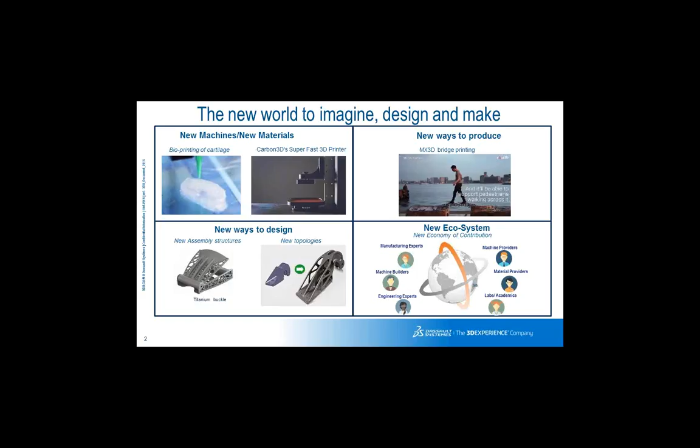And it is definitively in these new ecosystems that Dassault Systèmes plans to play a tremendous active role, providing to companies, whatever the company's industry or size, help in serving their final customers. So as you have already seen, 3D printing or additive manufacturing is really diffusing in all industrial sectors. You see here some illustrations: medical, industrial, final business to customers chain.

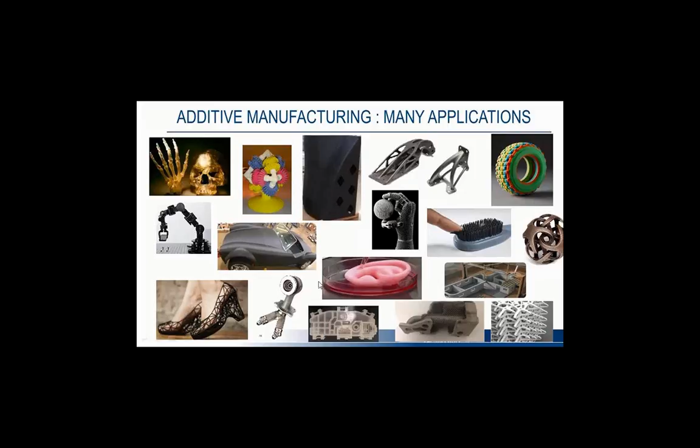And we see here different purposes, for new housing in plastic, for example, in new design, as well as architecture, where we also host in the Dassault campus a complete house that has been produced by 3D printing, and definitively in aerospace and defense, where comes the need to reduce the weight, which is attached to additional cost. To maintain a product, it makes sense to consider those new technologies as an additional and serious option to meet those challenges.

Examples in aerospace and defense, or printed parts in maintenance, repair and overhaul sectors. For ANSAT helicopters, they already produce those parts to repair the parts. But not only: just a smile to the Tour de France 2016, where a lot of participants really leveraged this new technology for their suits, for their bikes. So it's really diffusing in a lot of sectors.

I was yesterday in a 3D printing show in Lyon, where there were a lot of actors in this medicine prosthesis domain that are seeing in 3D printing technology a very strong opportunity to respond better to final clients, having lighter parts, easier to support, and for sure better to repair and install.

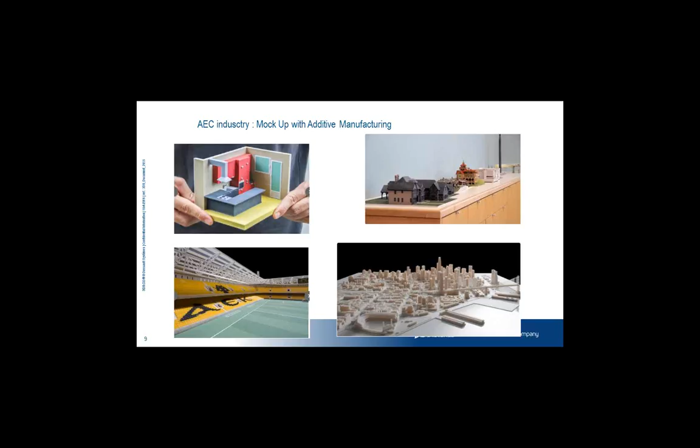But not only, the AEC industry as well, for mock-up, for being able to have a look on a building, on a house, on a city, possibility to rapidly generate a plastic 3D printed part, and to really react to customer demand in a minimum amount of time.

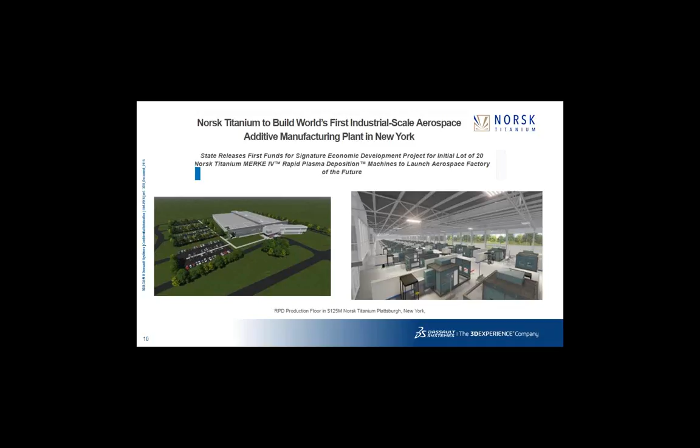We do also see a lot of plant programs that are launched over the world, where here we do really speak about printing machines, full plants. They will deliver 24 hours a day parts that will be either metal or plastic, in order to support whatever industries. So this trend is really massive over the world.

We do also see the European Union that is really seeing in additive manufacturing a huge digital economy transformation, helping the economy of all actors in Europe. But not only, you already have in Spain the Asociación Española de Rapid Manufacturing that has been put in place with a referencing site, aserm.net, as well as ADDIMAT, I guess you are aware, that are really showing the strong activity in Spain of additive manufacturing, without forgetting to mention the first congress you had in Barcelona in June this year.

So all being said, there is definitively a momentum where all industrial sectors, for new product, for innovation, for maintenance, for repair and overhaul, for additional services in order to get new weight-reduced parts, do really show a strong interest in these manufacturing industries. So let's see how now Dassault, with a suite of products and 3DEXPERIENCE, is proposing responses to those challenges.

Last but not least, I guess you have understood, additive manufacturing is really embracing all sectors, all business profiles, architects, students, engineers, design entrepreneurs, shoe manufacturers, drone enthusiasts, whatever. So all industries, all sizes of industries are really impacted.

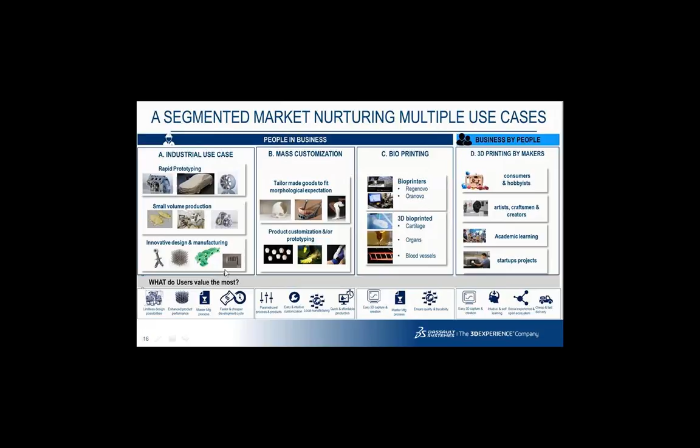And having this said, we do really distinguish the industrial use case, on which we plan to support you in metallic as well as plastic, but also concrete additive manufacturing technologies. And for this, we illustrate for powder bed fusion, for example, or direct energy deposition, some solutions that will be presented in a minute, as well as material extrusion.

So, as I said, we see this additive manufacturing as a kind of circular set of big actors. First of all, in silico material engineering, because we speak first about material, whether metal, alloy, carbon, plastic, to really at a microscopic level be able to serve you in better managing the characterization of the material you're going to have in your printing machine and the mechanical properties you could expect from it.

Second phase, which is what we're going to demonstrate in a few minutes, the functional based generative design solution, in order to give the conceptors and designers a tool easy to use to develop and generate a first concept that will benefit from design optimization, that will follow some acceptable stress rules as well, and also have a perceived material shape aspect acceptable for the final usage. So this second step, presented in a few seconds, is the first brick of our offer that will be progressively put on the market.

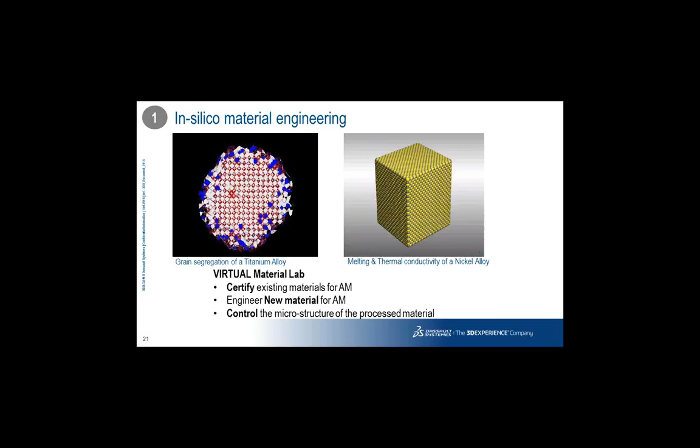Definitively the solutions that are going to be presented to you will be aiming to provide you once again easy-to-use design solutions that will be based on a kind of scientific approach with FEA calculation and optimization that will be completely, let's say, transparent to the end user. So it's very important to take care of the acceptance of such tools by the designers in order for them to adopt and use them in a very regular way.

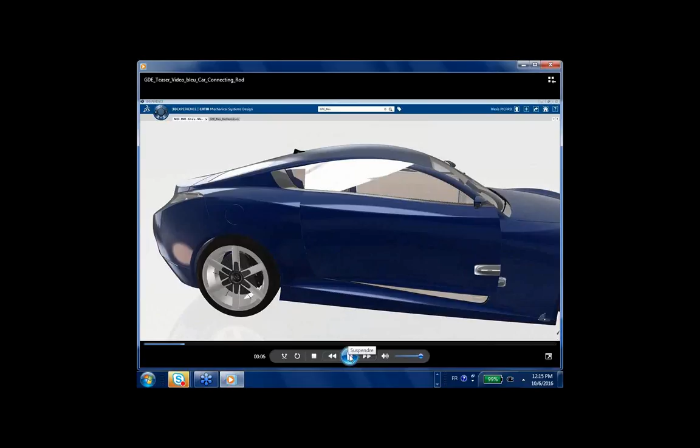Let me show you one illustration of this additive manufacturing fabrication offer in a context of car design for innovation. I do guess you do see my screen. So here we are designers of a car component for a door opening system, and we want to, let's say, produce this gray part in an additive manufacturing manner. So we are in the 3DEXPERIENCE platform of Dassault Systèmes, enabling the designers to start from a very detailed, original concept to run a first kind of design.

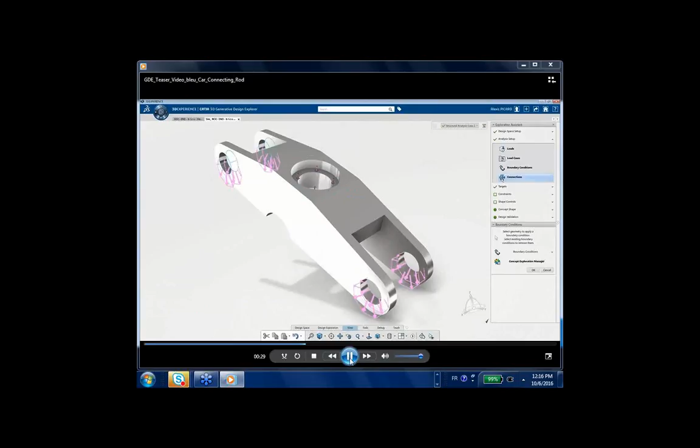So we are on the first creation, where the designer will simply take the part in the assembly and partition it in order to consider the areas of importance of the part, where it will define the way this part is linked to the exterior. So it will define its requirements in terms of boundary conditions. It will as well define the loads and boundary conditions that will apply on the part, the way the part will be connected to the exterior, in order to really take into account how this part is going to be used in the context of the assembly of the car.

And then it will put an objective, for example, reducing the mass of the final part by 25%. Then in a transparent manner, the computation will be run, where at the end the end user designer will see the distribution of the density of the part and the way the part will be optimized. At the end, you will have a final proposal that will be validated against the original stress acceptance in terms of maximum stress, ensuring that it fits the expectation.

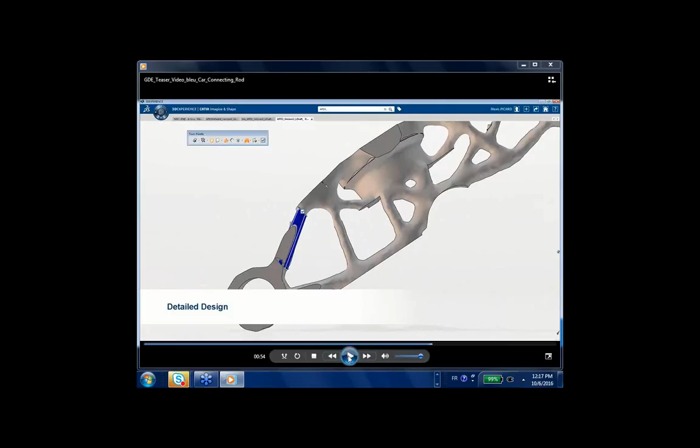And the final step will consist of redesigning some detailed parts, benefiting from an integrated set of tools inside the offer, enabling the end users, from a perceived quality aspect, to get acceptable surfaces on the final part. So this is the final phase of the offer we are now putting on the market, enabling from an original part to really optimize the final one in order to get weight reduced in an optimized way.

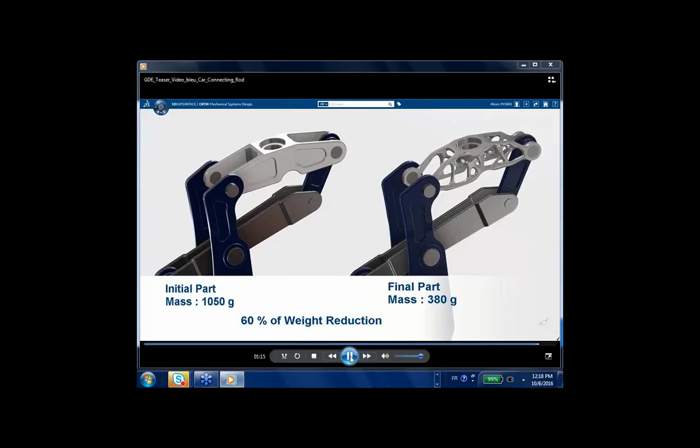So this is just, let's say, an appetizer where you immediately see the huge gain in terms of mass reduction that you can get from this approach. This is an example in the car industry. This can definitively be duplicated in other industries, and it will be with pleasure that Daniel Pyzak will now illustrate to you how this solution is running. Daniel, up to you.

Okay, merci Jean-François. Now, Daniel, you can speak, and in a few seconds I will give you the control of the presentation. Okay, just a second. Yes. Okay. It's now loading your screen. Okay. The floor is yours. Okay, thank you, Nicolas.

So, as Jean-François stated earlier, there are 5 important topics to cover when we talk about additive manufacturing. I will come back to the first, the fourth, and the fifth, but I will focus more on the second and the third in my presentation. So let's start with the part design aspect.

You know, I'm visiting a lot of customers everywhere in the world dealing with additive manufacturing, and when I meet them, some of them are proud of themselves, some of them are not. But the ones who are proud tell me, Daniel, after 4 years of experience with this new additive manufacturing machine printing metal parts, I can claim that my success rate is 75%. It means that 25% of the parts that they are 3D printing in metal have to be thrown away.

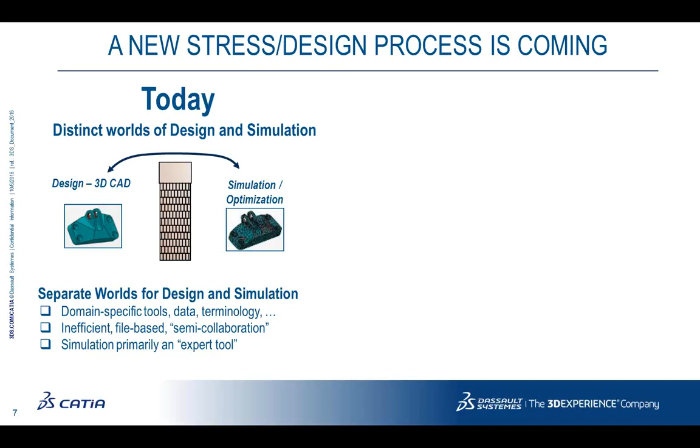But topology optimization is still today something very complex. You need some finite element analysis background. You need some guru expert in CAE, and typically mechanical designers like me do not understand them. We are not using the same language, and we are not talking to each other. So the idea is to take the best of both worlds, the CAE expertise of the gurus and the mechanical good sense of designers, and bring those two worlds together in one single application. And this is typically what we are delivering today in CATIA.

It's called the Generative Design Explorer, and it embeds not only topology optimization, but also structural analysis and reconstruction of the CAD model from the result of the topology optimization in a very simple, easy to use way, with no data exchange and no data transfer, and it is for us the future of design. After CAD modeling, then solid modeling, then feature-based modeling and functional modeling, now we are really doing science-based design, where the system proposes a solution, and then as a designer you take your responsibility and modify the design if needed to fit your specification.

Let's have a look at how it works. The best is to run a video, and I will stop at any time to explain the various stages. Okay, let's start. I'm a mechanical designer. I am in CATIA 3D Experience, and I have the app called Generative Design Explorer. In this app, I have everything I need to perform structural analysis, topology optimization, and reconstruction of my CAD model to be either 3D printed or manufactured in a more conventional way, such as casting, injection, stamping, or milling.

Okay, so let's start. The part we would like to redesign, thanks to science-based design, is this part in the middle of the screen. As you can see, it is fixed on a beam with 8 different bolts, and it is supporting a heavy part which is rotating. Okay, so let's start the process now.

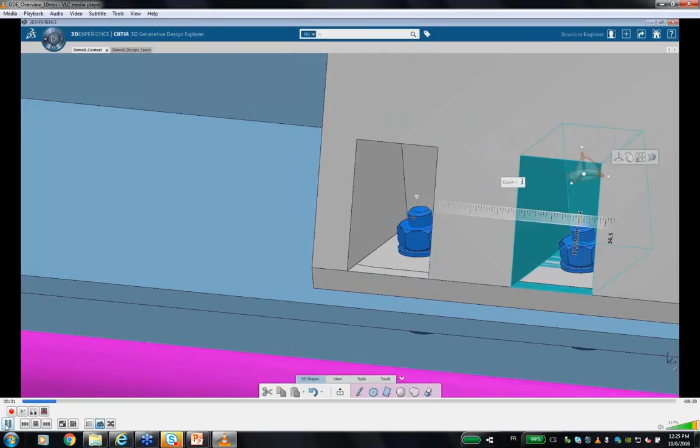The very first stage of the design is to create in 3D the so-called design space. The design space can be seen as an allocated volume in space where my future part will be located. Here we could have used our solid modeling Part Design or our surface modeling Generative Shape Design in CATIA. We decided to use a new app on the 3D Experience called CATIA Natural Shape. As you see, it's a very simple tool, direct modeling, very simple to use. It can be used by FEA guys as well as CATIA geeks, and it creates an allocated space.

This space could have been given to you or to me by my boss, because this is a STEP file coming from wherever, or it is just the allocated space from an assembly that I have to deal with and create my part inside. And this is my space. Now I'm still in the 3D Generative Design Explorer app, and I'm starting to prepare my specification.

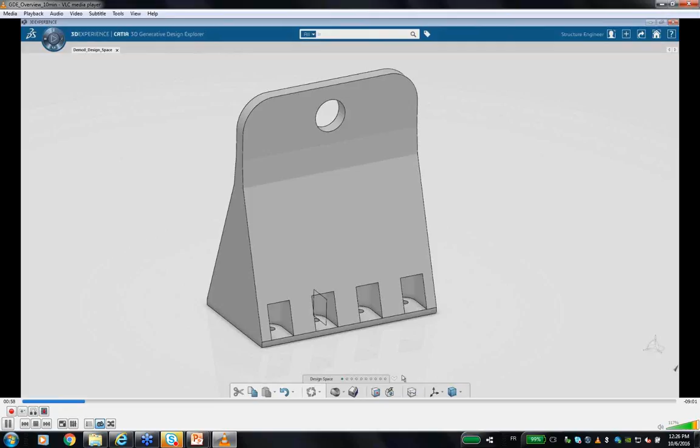First, very important action, I have to assign a material to my part. Let's select this material. That's it. And now I will carve out, I will partition my space into subspaces. Typically, those subspaces that you can see here around this axle and around the bolts are areas where I would like not to remove material. I would like to keep some material around that.

As you see, it's a very simple, straightforward user interface. You have a wizard with traffic lights. When the traffic light is green, you go to the next step. And when all the traffic lights are green, you can launch the computation. So here I'm defining my functional areas, okay? If I want, I can at any time display the mesh because it's a finite element model here. Usually we don't do that at the beginning, we do that at the end if there is some tuning or refinement to perform to the analysis.

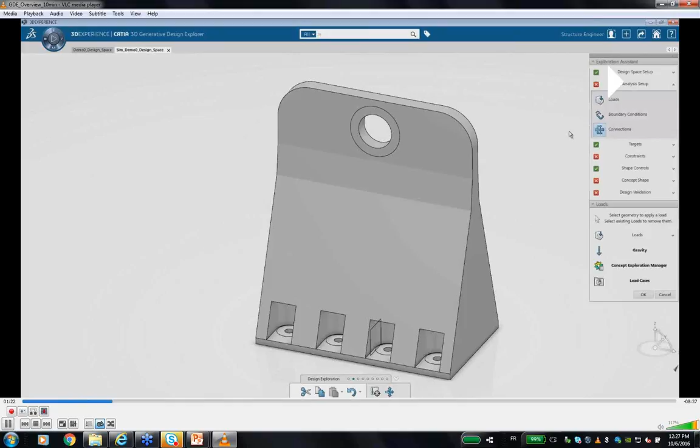Okay, my functional regions are those. I click on them, very simple. And this one, we have 4 bolts, we have the axle areas. This is done. Now I will define my loads and my boundary condition. For the loads, it's very simple. Here it's a bearing load, so I select bearing load among the various available options. And I type in the force in X, in Y. So this is here in X. I type the force in Y. So I have 2 loads, and I will combine those loads, bearing load 1, bearing load 2, and I will create multiple cases. So I have the flexibility of combining those bearing loads in multiple options.

Once the loads are defined, I can define the boundary condition. I could have clamped the part, could have taken the bottom face and said it is clamped. Here we are a little bit more precise. We will define the boundary condition as being done through fasteners. So I will define now my fastener boundary condition. I click and I select, as it is a bolt, the head diameter, the nut diameter, but also a stiffness both in translation and rotation. Those are easily done in the Generative Design Explorer app.

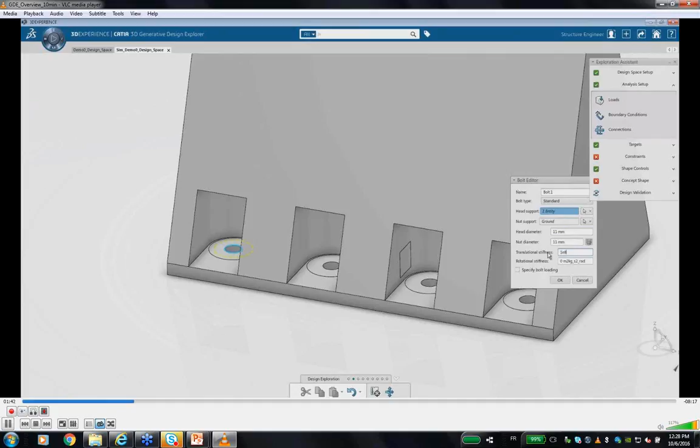The system is quite smart. It noticed that there are 3 other holes with the same diameter and the same depth. And it asked me, do you want to replicate these bolt fastening conditions to the other areas? I say yes, and automatically the definition has been replicated to the 3 other bolts. Once this is done, next, define a target.

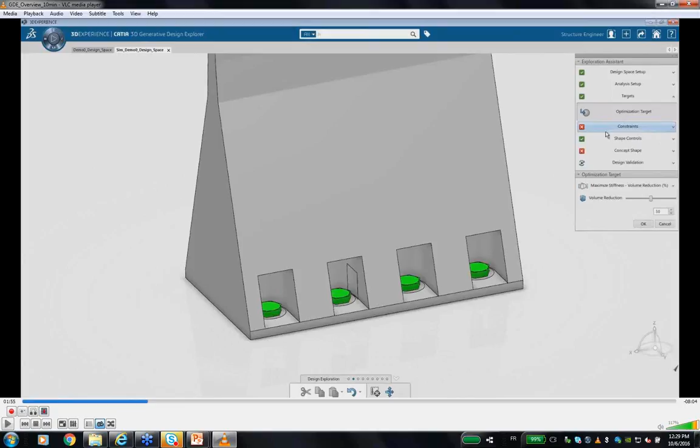You will see what type of constraints I can put in. Here, I don't want to have a maximum stress bigger than a given value inside my part. Okay, so I will type in this maximum stress. As I have fasteners that I purchase from a supplier, I will also indicate to the system some other characteristics of the bolt that I buy from the suppliers. So select the fastener and now refine the information.

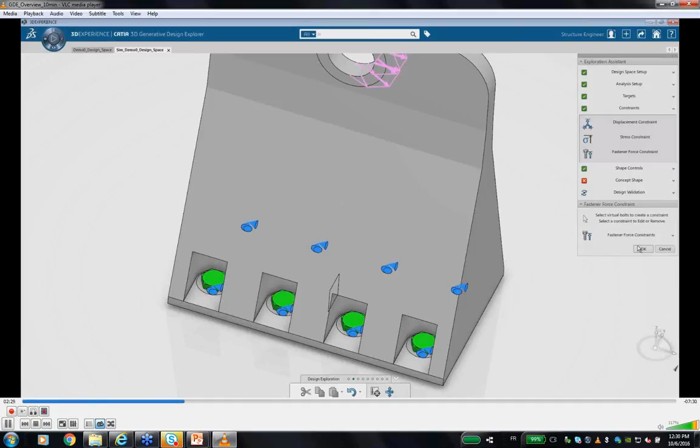What type of information can I add? A maximum X shear, a maximum Y shear, and a maximum tension that I can put on the bolt. So let's type in those values. It's very simple, very straightforward. I'm guided. And this is it. Now I can also add some constraints on the final resulting shape that will be produced through the topology optimization and the structural analysis.

What type of constraints can I put? Let's start with a very simple one. I don't want to have a part which is too thin in some area. So I put a minimum thickness. Let's put 3 millimeters. I also want, even if the boundary condition and the loading condition are not symmetrical, to get a symmetrical shape.

So I just click in the session, in space, on the plane, in the CATIA session, and that's it. And now I will perform the topology optimization and perform the structural analysis. You will see that all the parameters that I type in are in the spec tree here, and of course I can modify them at any time.

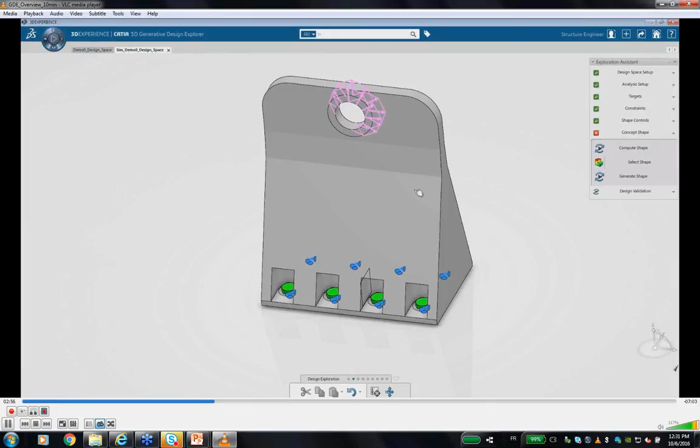So let's compute the shape. This, of course, is not instantaneous. It can take some time. In this particular case, it took 10 minutes on a normal laptop. It can sometimes take more than that. It can be faster. It really depends on how many constraints you put, how small the meshing is, how big the part is, so how complex the part is. So there are various parameters that influence the final computation time. But when it is computing, you can, by the way, continue to use CATIA if you want.

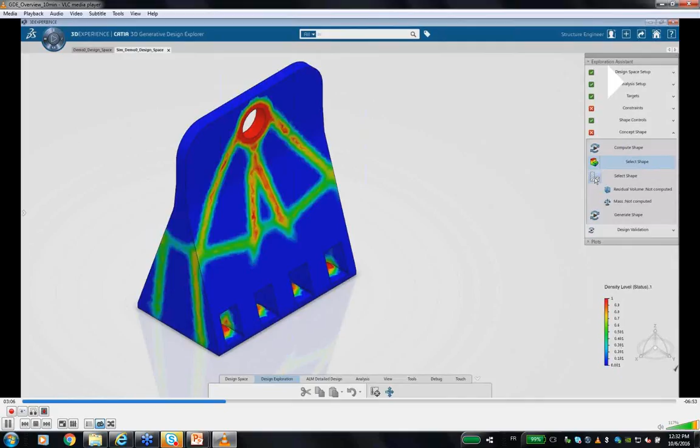So this is the result of the computation, both stress analysis and topology optimization. What you see on screen, what is blue is empty. What is red is plain. In between, you have various areas of different densities, okay? So the user now, as a mechanical designer, can put a threshold. Here, the threshold is at 0.5, and the threshold distinguishes between plain and empty areas. Between 0 and 0.5, it will be considered as empty. Between 0.5 and 1, it will be considered as plain.

So what you see here is not acceptable. Okay, yes, maybe my volume is reduced by 93.5%. My stiffness is maximized. So as a mechanical designer, I take my responsibility and I move the threshold to make something acceptable. Here, it could be better. It is better, but as you see, you have orphan branches. It's not mechanical; orphan branches do not mean anything. So I continue to move my cursor.

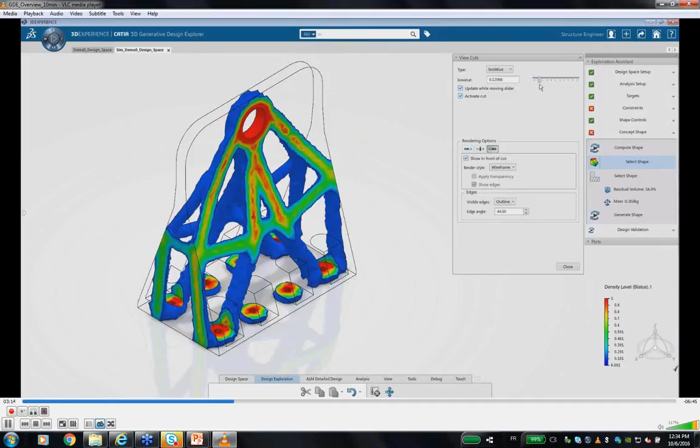Here's something better. It looks mechanical to me. It looks producible, manufacturable, and I still have a good residual volume, which is 13, almost 14%. Okay, it's not 6.5, but still it's a very good result. By the way, you can see that the system is telling me that 4 bolts are enough. I don't need 8 of them. Okay, which is good news. I'm winning money. So now, once this cursor is finalized, in just one click, generate shape.

And here it's real time. I get a CATIA solid. It's an exact CATIA solid, made of cylinders, made of planar areas, and for those which are very organic shapes, we created subdivision surfaces thanks to our subdivision surface technology in CATIA. For those who are familiar with a product called Imagine and Shape, which was mainly made for industrial designers and stylists, we use this technology to create those surfaces, which are exact surfaces, C2 continuous, curvature continuous surfaces.

Of course, you will see that they are a little bit rough, but this is a CATIA solid. You can make a fillet here if you want. You can, of course, delete those 4 bodies which are useless. You can create holes. You can print it. You can make a drawing. You can even mill it if you want. It's a very exact CATIA solid. You will see that it's not enough for what we want to do. We will modify it later, but it's a solid. There is no break in the numerical continuity. Most optimizers, not only ours, create a mesh as a result, maybe an STL file. It's not an exact solid. Here, it's an exact CATIA solid.

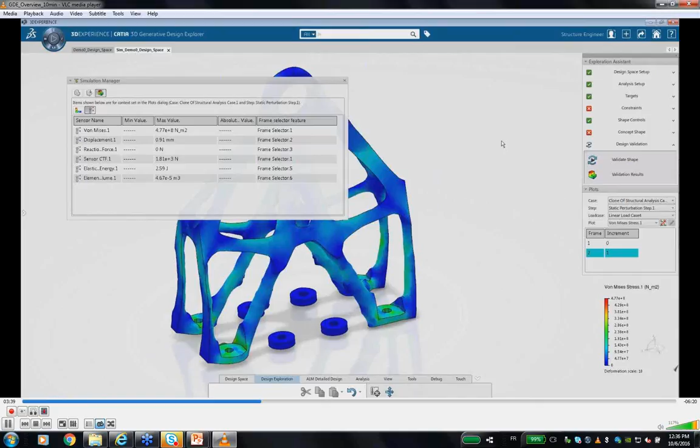Okay, as I transform my geometry, I went from the design space to a new geometry. I have to validate my shape. So I have nothing else to do than simulate and validate, no other pre-processing. I'm not forced to redo the pre-processing. I just simulate to validate my shape. Here I display the von Mises stresses, so it looks okay to me. I can display the displacement. I can display any other outputs that I want to select. And this is very important. Very easily, a normal mechanical guy can define boundary conditions, loading cases, a design space, and create a shape which can be a proposal for his detailed design.

Now that it is done, a very important point is that this tool also helps you to make various alternatives, variants. By just copying and pasting an actual study, which was my previous study, I can quickly create a clone of this study and now modify some of the parameters. Let's imagine this part will not be 3D printed, but milled or cast. I'm not as ambitious as before for the volume reduction. So I type in a smaller value or a bigger value.

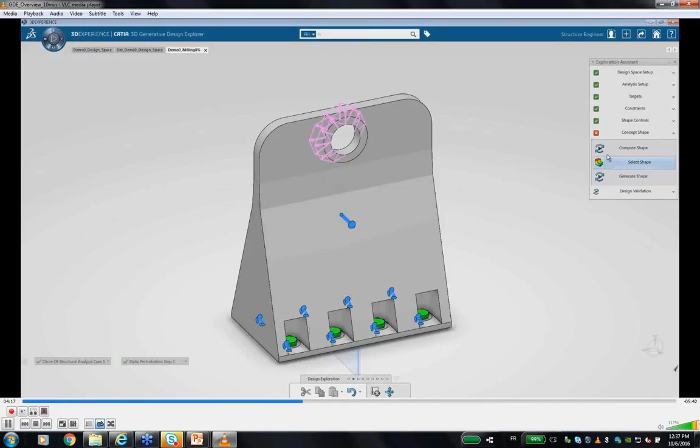As the part is cast, I will ask the system to compute a shape which has no undercut along the pulling direction, the molding direction, which is here Y, okay? And the system will prevent any undercut in the final shape. I compute the shape.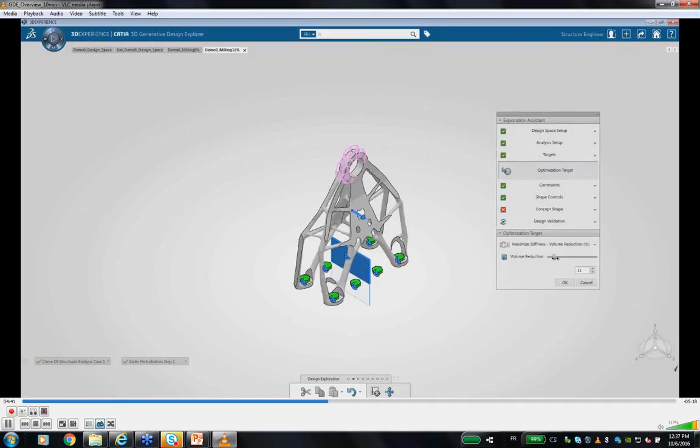Again, I get a result. So now I have two options, two variant designs. I can, of course, make as many options as I want because I have time to study more alternatives. Here again, maybe I change an optimization target. For example, I can change some other conditions, and I can compute a shape.

At the end, in my particular case, I have 8 different variants, and now I will select the one which is the most appropriate, either to my weight target or my production constraints. Again, a shape which will be 3D printed should be different than a shape that will be manufactured with conventional manufacturing tools such as milling.

So let's select all of them, and now we can see the geometry, the input, the output, my KPIs, the mass, the maximum von Mises stress and stuff like that. I can display all the variants together. And to help me, now I am switching to another app. So I'm no longer in the same app, which is Generative Design Explorer. I go to another app, which is called Simulia Results Analytics.

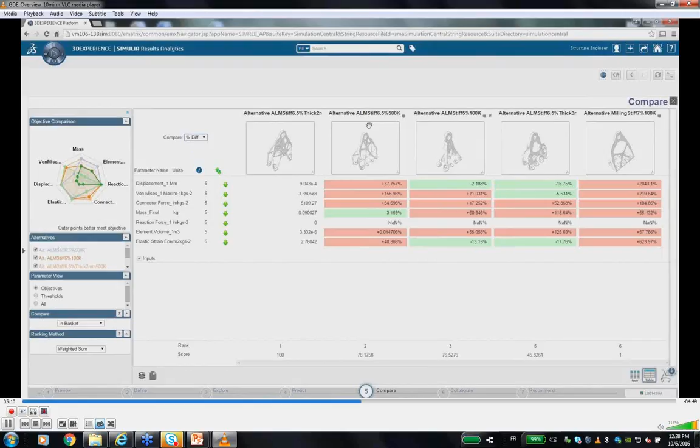And this tool helps me with a spider chart, but also by giving weight to the various criteria, I can make a quick choice of what is the best solution according to my needs. Let's select this one, and now we go further. Now the job is to refine the shape, because yes, you can print it. Yes, maybe you can mill it, but you will have some issues because it's not that easy to mill. So let's imagine that this will be 3D printed, but I would like to have a better quality here of the resulting surfaces. So let's refine the shape.

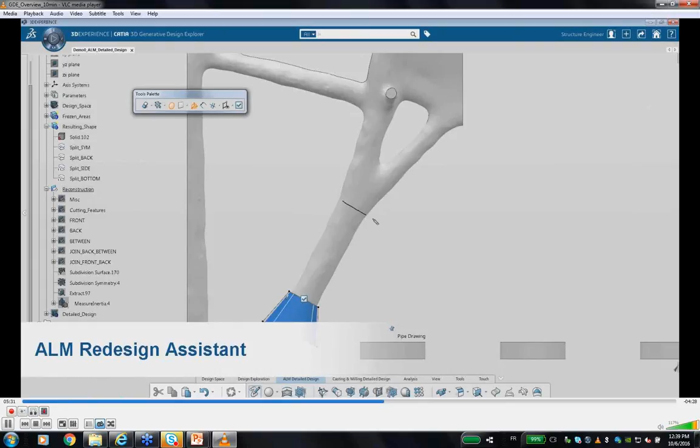As the part is symmetrical versus 2 planes, I just work on a quarter of the part. Here it is. And here, in my Generative Design Explorer, I have a lot of tools to complete this refinement step. One of them is based on subdivision surface techniques. And here, by just creating and dropping lines on the data, I can create tubes all around my data, my solid, very easily. And those are very, very smooth surfaces.

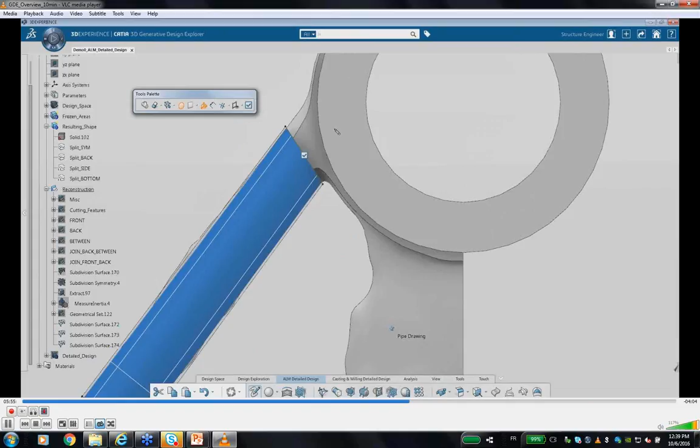And from the various branches that I'm designing, I can then later on blend them and continue my design and incorporate this design with the current cylinders, planars, and all other features that were inside my part. You can see here the blending operation, very easily done. And at the end, as I modify my geometry, I have to validate.

For that particular example, I asked my colleague, the FEA guy, who is at the desk just beside me, to complete and validate what I did, and he will perform some more complex simulation. For example, in this case, he will make a buckling analysis to compute the eigenvalues, and he's doing that by himself, adding some other FEA analysis. He's checking and he tells me, Daniel, there are too many constraints in a given area. He will put a compression and please change the design.

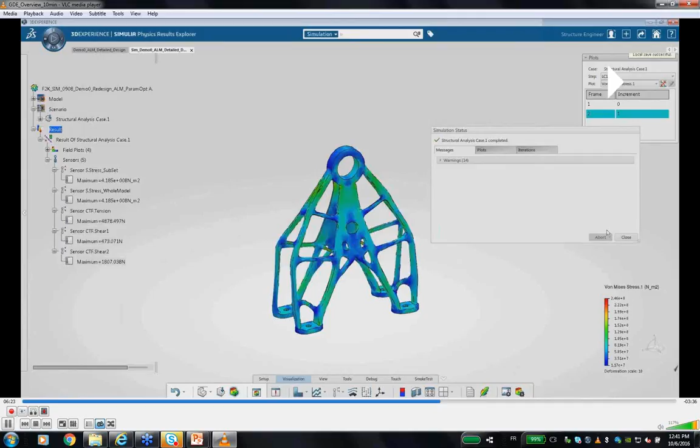So as you can see here, it's a real collaboration. I was designing the part with a very basic but complete structural analysis. For extra analysis, I pass the model to my colleague. He performs simulation and he tells me what to do. So in this particular case, I will have to change. So I go to my Generative Design Explorer. I modify my shape according to the recommendation of my colleague.

And as I modify the shape very easily, I have to perform a validation to check if now it's okay from a buckling analysis point of view and eigenvalues point of view. Checking is done very easily. This can be done in Generative Design Explorer, and it's finished.

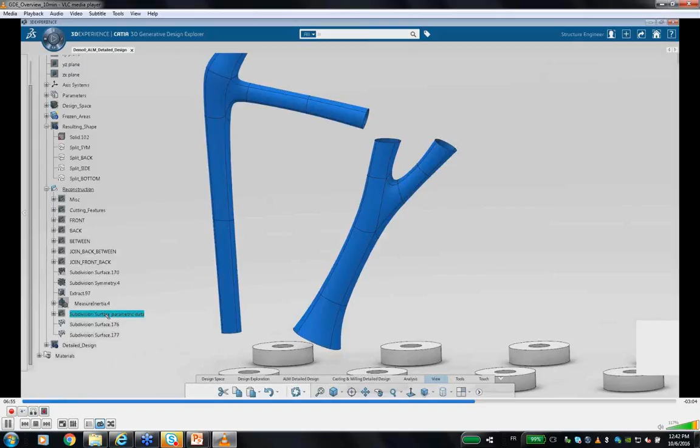So we could do very easily what we call a topology optimization. But sometimes after a topology optimization, you would like to go further. You would like also to optimize the overall dimensions of the part, maybe the dimension of those branches, maybe the height, maybe the width of the part, okay? The good news is that not only can you modify the tubes like with virtual clay modeling, but you can also modify them with parameters.

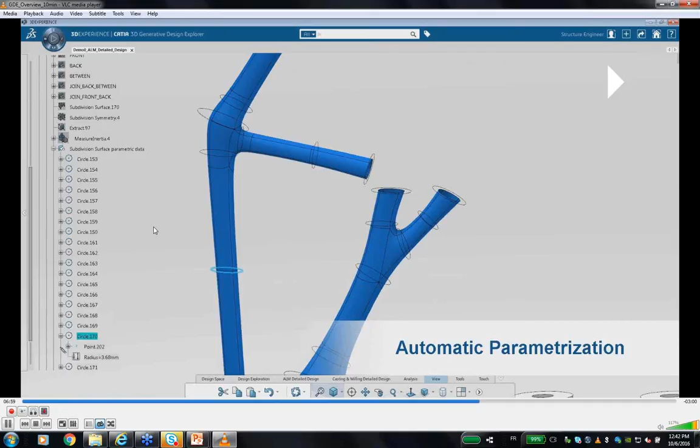In this case, what CATIA did automatically for you, when I was creating the tubes by dragging some lines, the system automatically creates circles, and the center of the circle and the radius of the circle are parameters that I can modify. So not only can I push and pull on the surface, I can also change the radius, and the shape is modified accordingly. And I can change the position of the radius, and the shape is modified accordingly.

Now I have parameters. I can now perform a parametric optimization. So I will tell the system, you can change this circle, you can change this circle, maybe you can change the position of this one, but not its radius, and so on. So you can freeze some parameters and give some freedom to the system to find the best value of the other parameters.

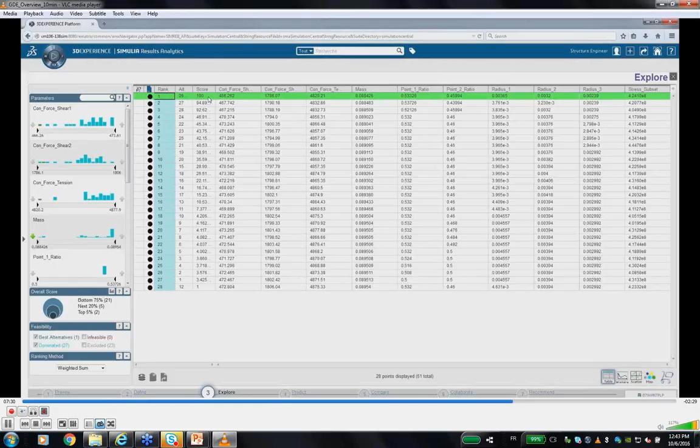So in this particular session, we'll now move to another app of our platform, which is called Simulia Process Composer. We tell the system what is frozen, where is the freedom, and the system performs an optimization of the parameters, finds the optimal set of parameters that will fulfill my specification in terms of thickness, maximum von Mises stress, and so on. Okay, that's the first step. So after a topology optimization, I can do a parametric optimization.

Now, just to show you that we don't only think 3D print, there is a big aircraft manufacturer in Europe. His wish is to optimize 100% of the parts of the plane. But he is very pragmatic. He says 95% of those parts will be manufactured with conventional means, okay? And only 5% will be 3D printed. It's still a big number, but we also have to take into account the 95% of the parts which are optimized, but need to be reconstructed, need to be manufactured with conventional ways.

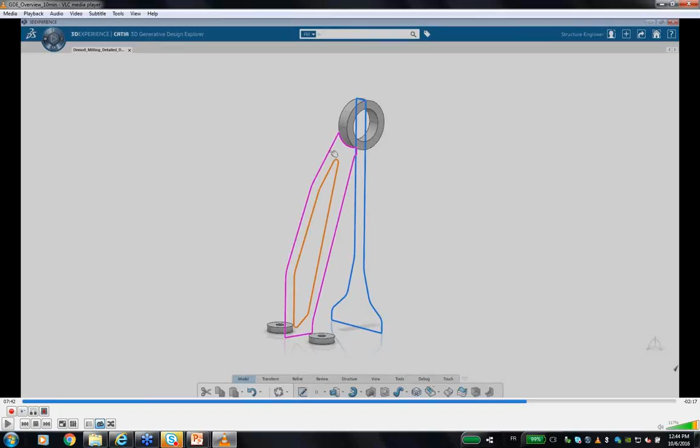That's why what is shown here is that from the output of the topology optimization, we can also create a shape which is not really an organic shape, something you might be more familiar with, like pad, fillet, draft, if the part needs to be molded or cast. And it's a traditional way of doing the job. So we also have inside the same Generative Design Explorer solid modeling and surface modeling to perform this type of redesign.

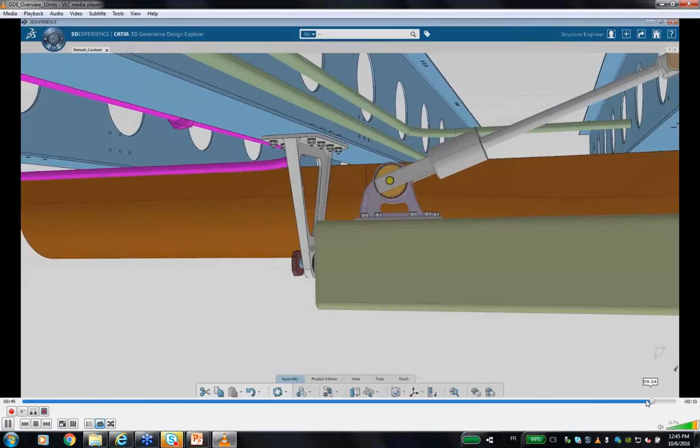And of course, as we redesign something, we have to validate the shape to see if the specification, the structural analysis is okay, which is done here, and so on. And at the very end, oh, I'm a little bit too fast, you can see the result. So this was the initial part. This is the design space. This is one proposal of organic shape that will be 3D printed, another one, and this is a part that can be milled.

And from that, you can see here the various options. We have here the so-called buy-to-fly ratio, which is a buzzword in the aerospace industry. Buy-to-fly ratio means if I have to create this particular part, I will probably buy maybe 15 kilos of titanium to get the final part. So the buy-to-fly ratio is 15 to 1. Now, if I take this part, yes, I do need 15 kilo blocks, but I have less material. So I have decreased the buy-to-fly ratio, but not that much.

And of course, when you do 3D printing, you do not start from a block. You just consume the mass of material you need to produce the part because you are burning powder. And of course, the buy-to-fly ratio is much better. And that's it for the first step of the presentation, which is science-based design, thanks to CATIA, Generative Design Explorer. I hope it was clear enough.

So let's see where. Oops. Just have to switch. Here we go.

And now that I showed you how you can design optimized geometry from specification, boundary conditions and loading cases, I will show you how we can now prepare the programming and, more importantly, how you can simulate the programming of the 3D printers. So that's important. This is just a small story, a true story, okay?

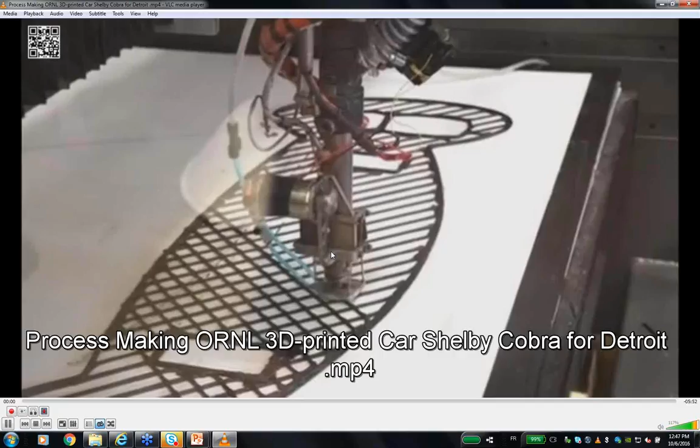This is a Cobra Shelby car. The car has been 3D printed. Most importantly, the chassis has been 3D printed, with this type of machine. It's a machine designed by a US company called Cincinnati. And it's not metal. It's a resin reinforced with short carbon fiber, but it can create very big parts. It's a so-called BAM, Big Area Additive Manufacturing machine. So you can see here how the machine is behaving. So the idea was to make the chassis of this car.

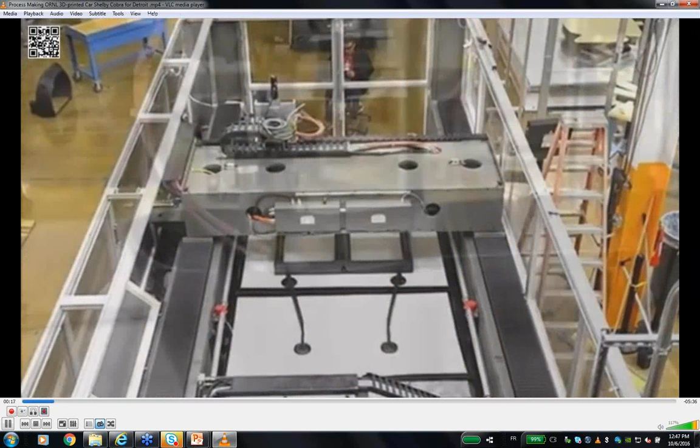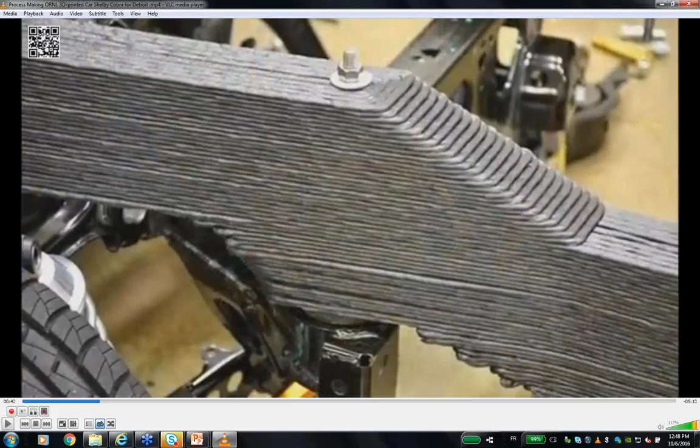And you see here the machine. And you will see how this machine is, in fact, burning the resin and laying out the resin layer after layer, okay? And in fact, the story of this machine is that the very first chassis that they developed, once the manufacturing was finished, when they took it out, you can see here the various layers. Almost every layer delaminated, okay? So it was completely broken. You have layers everywhere, okay?

And so the people from Cincinnati came to Dassault Systèmes in the US, where we are developing our finite element analysis suite of solutions. And we analyzed what was happening from a stress analysis, from a delamination analysis point of view, and we helped them to modify the parameters. So maybe the width of the layer, maybe the height of the layer, maybe the trajectory of the deposition of the layers, and the second trial that they made, everything was okay.

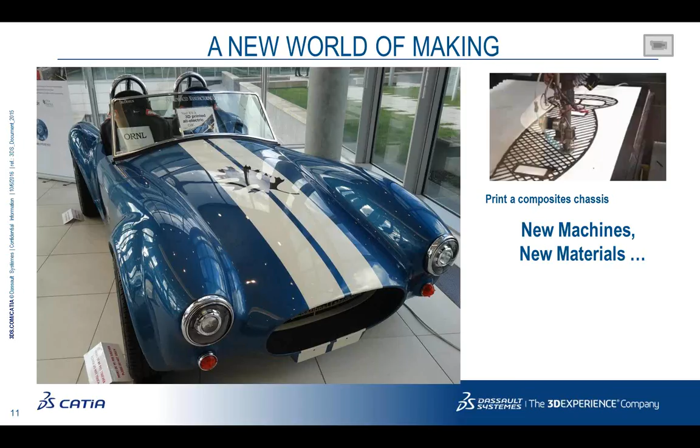So what does it show? It shows that the process of additive manufacturing is very complex, and you need to master the process to reduce the failure rate, okay? And this is typically what we are doing at Dassault Systèmes. We introduce inside the programming of the machine the simulation of the manufacturing process.

Okay, I make a small break. According to the ISO standard, there are 7 different ways of producing thanks to additive manufacturing techniques. And we are very ambitious at Dassault Systèmes. We would like to develop a dedicated app for almost all of them, except one which is not that important, taking into account the constraints of the machine, taking into account the material which is used by the machine, to provide a solution that helps the manufacturer of the part to reduce the risk of failure.

So just an example. Oops, my mouse. I am inside my additive manufacturing shop floor. Here in this case, it's an assembly of the 3DEXPERIENCE, so it's more scenic. I am in a so-called app called Delmia Powder Bed Fabrication, because the priorities in terms of delivering a dedicated solution are first powder bed, second projection of powder, and the third one is wire deposition. We are mainly focused today on metal machines, even if some of the features developed can also be used for plastic or resin machines.

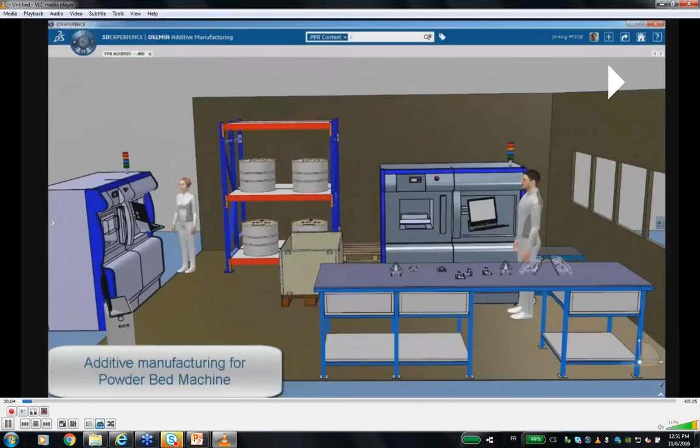Okay, so let's have a look. So I am in my shop floor. First thing to do, I have to select my part. The part can be searched in the database, or here I have the part directly on the table. So I add a part to my context. I check what is the material of this part. It's aluminum. Knowing that, I will select my powder in my shop floor. By clicking on the barrels, I can see the characteristics of the powder. As you know, if I'm using powder bed or projection of powder, the material might be the same, titanium, aluminum, but the diameter of the spheres of the powder is obviously different. So I have to select the right barrel and the right powder.

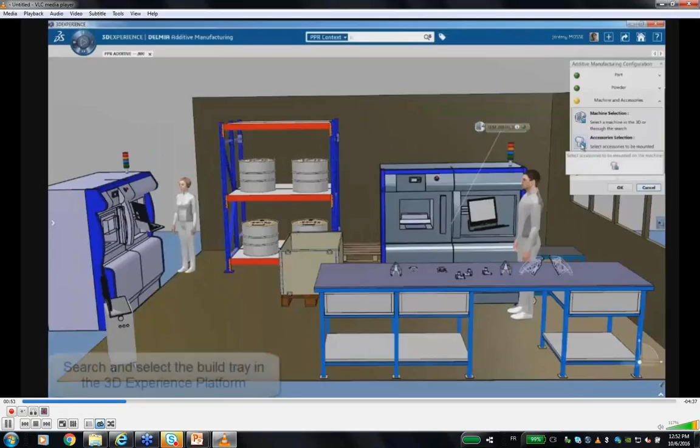Once this is done, I will, of course, also select the machine. In this case, I'm selecting an SLM 280 machine. So I have the geometry of the machine. I have the constraints of the process. I have also other characteristics that the system will take into account when it guides the user in programming the machine. Let's select a build tray. So I will select the build tray in my database.

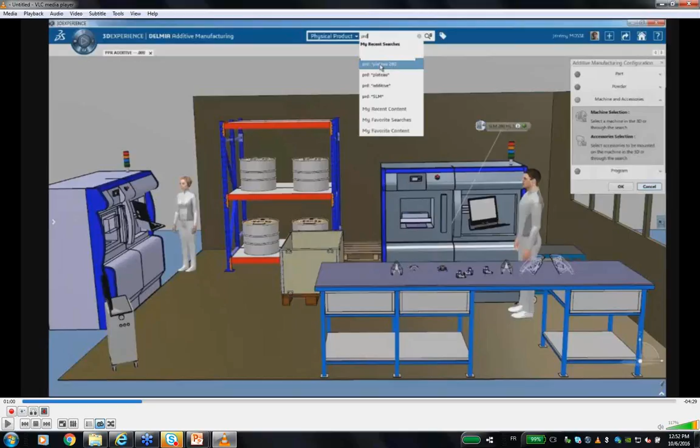As you know, or you might not know, when you have a tray which is supporting the creation of the part, sometimes you use the tray as a fixture to perform finishing operations with machining, for example. You need to cut the part from the tray, and of course you then finish the tray a little bit, and the dimension of the tray might vary along its life. So that's why for us a tray is a PLM object. It has its own life cycle that you have to take into account. That's why here I'm looking for the tray, and for the last variant or the last version of my tray.

Obviously, the dimensions of the tray are automatically selected to fit the machine because I have given the information of what machine I'm using. This is my tray. The system has various ways to optimize the position of the part on the tray, to minimize the areas to be supported. You remember, depending on the process, but today almost most of the processes of additive manufacturing need what we call support for overhang areas.

Typically here, this area has an angle which is almost 10 degrees or 20 degrees according to the printing direction, and we need to create support areas here. Okay. For here, of course, there is no support area because it's almost vertical. So we need to optimize the position of the part on the tray to minimize the support and also to minimize the height, because the printing time is depending on the height of the part on the tray. And of course, the finishing time is depending on where the supports are.

Today, as an average, it is considered that 50% of the price and the time spent to get a part from a 3D printing machine is coming from the finishing. Because removal of those supports is extremely painful, especially if it's very hard material such as titanium, Inconel, or stainless steel. Okay, it's a little bit easier on aluminum, but even in aluminum it's not easy. So let's optimize the position of the part on the tray to minimize the support and the height.

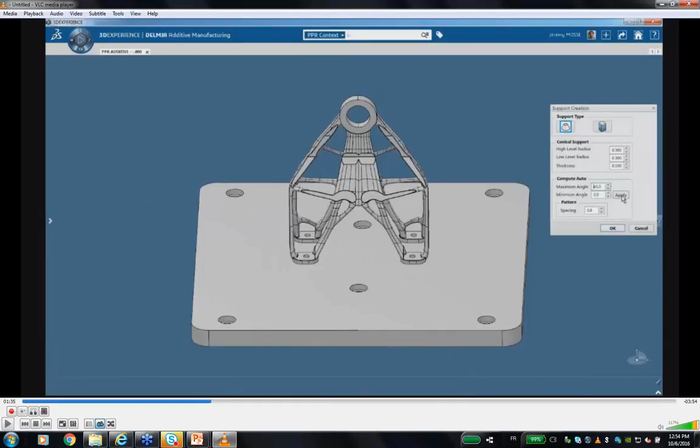The system has multiple options to select the type of support you would like to have. I will detail that. In this particular case, it's very simple. I will select just conical supports, and it will create those supports in every single area which is in between 0 and 45 degrees versus the printing direction, which is Z.

Here is a proposal of the system, and at this stage, I don't know if you noticed, but I do not change the data of the representation of the model. This is the CATIA part here. And the system is creating features directly on the CATIA part. I'm not forced to create an STL file or some other format. We have no break in the numerical continuity here. Okay, this is extremely important.

So I create my support, and now I can stop. Maybe I say, okay, I have my support, I have my geometry. I might now output an STL file or an AMF file, which is a new ISO standard for additive manufacturing geometry representation, or 3MF type of format, but I will detail that later. And this will be consumed by software coming with my printing machine or directly by the machine, and the system will print the part. But our customers would like us to provide much more.

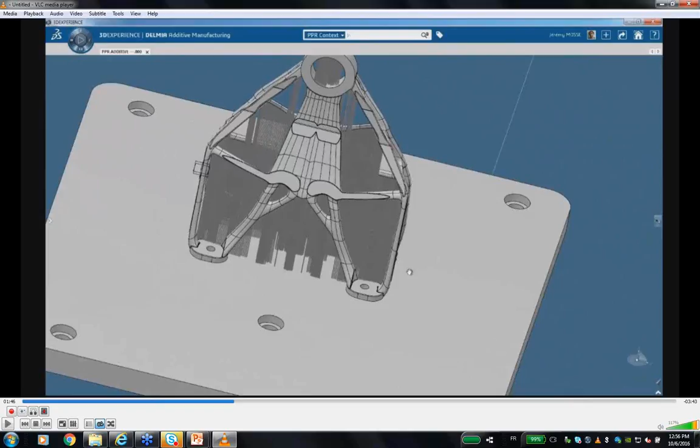So what is it? We now have a solution to slice the part and the support, but not only slice. Some machines, for example EOS, do not like the outer shape of the support and the part. They prefer slices. So we could slice and then send the data as a CLI format to the EOS machine, but we can do much more. We slice, but we also select among various lasing strategies the one which is the most appropriate to our process. Here you can see there is contouring for every single plane. We create contouring of the sections, and maybe this type of back and forth lasing strategy.

We can have a different lasing strategy for the support, because remember, they will be removed anyway at the end, so they might not be as strong as the part itself, even if, especially in metal, the supports not only support overhang areas, they also transfer heat. Like in foundry, when you are making a casting, you try to put the hot spot out of the part, and you create some special geometry outside of the shape that will be removed later on. It's very similar with support. It's heat transfer and of course supporting overhanging areas.

So here we have the laser pass. We know the power of the laser. We know the temperature of the chamber. And we now send this information to our finite element analysis software. To make it simpler to understand at the simulation level, we remove the support from the display, but of course the support has a very, very important thermal role. Okay, so we do that on the support as well. Here it's just to lighten the display.

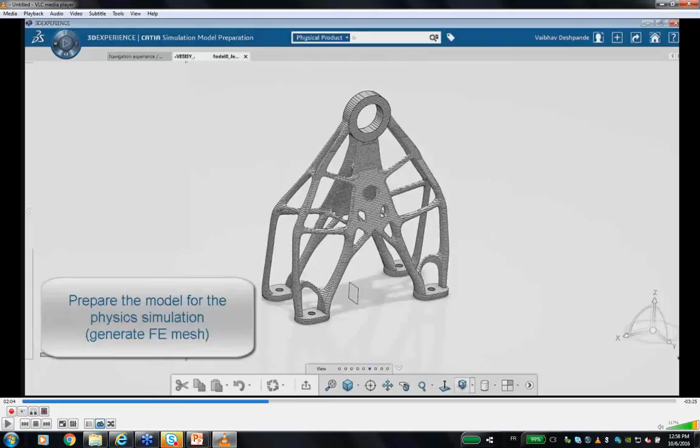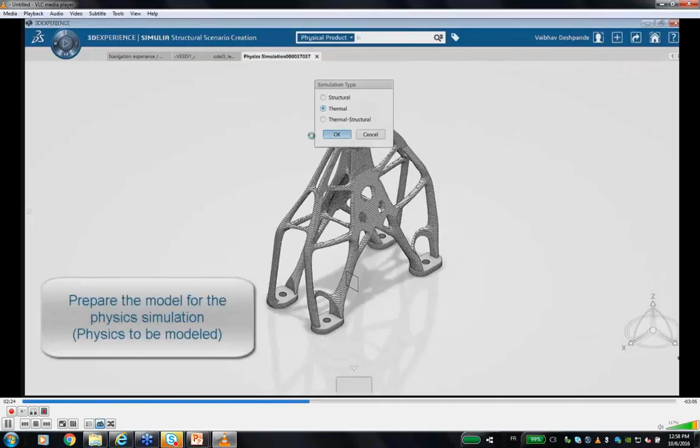And from that, thanks to our SIMULIA Structural Scenario Creation app, we will perform thermal analysis. So I go there, I select my app, and I perform a thermal analysis. The thermal analysis will show me the temperature of the part being printed during the printing process. I might discover some issues at that level.

And more important, not only does he perform a thermal analysis, but he can also couple the mechanics and compute a thermomechanical analysis. And from this thermomechanical analysis, I can have an idea of the stress inside the part. And from this stress computation, I can predict the distortion.

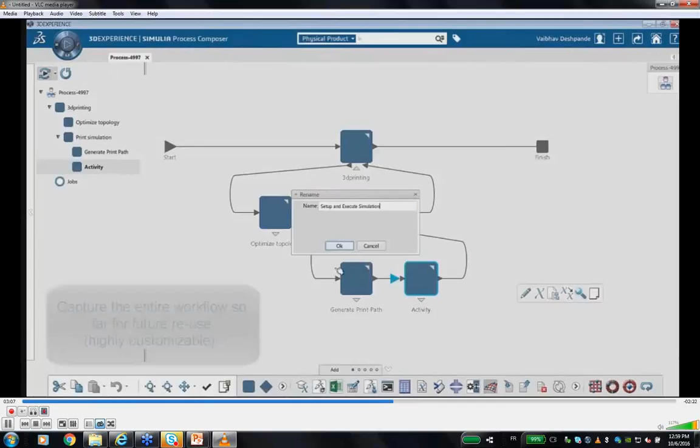Okay. So here, we will also use Process Composer to optimize the process to reduce the distortion. And here the idea was, as a demo, just to show you how we can, for example, play on one of the parameters to do so. The parameter we selected for this demo is to change the orientation of the laser path between consecutive layers. So we'll put an angle.

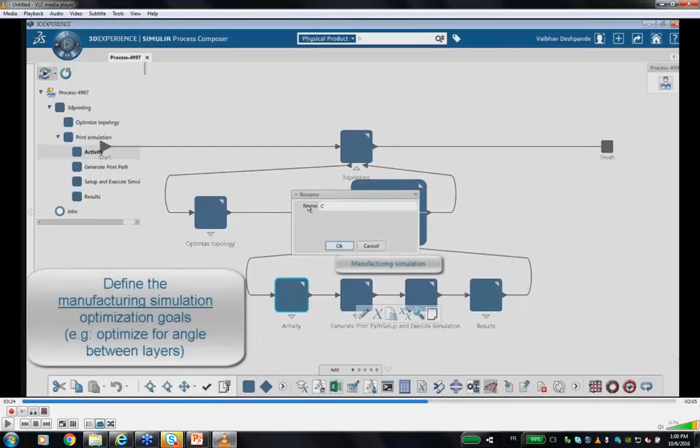For the first layer, it will be a given angle. For the second layer, we'll rotate by a given angle. Let's change by 45 degrees. So for the first layer, we have this, and for the second one, we have 45 degrees rotation of the path, and so on and so on. Okay. So now we will recompute the analysis.

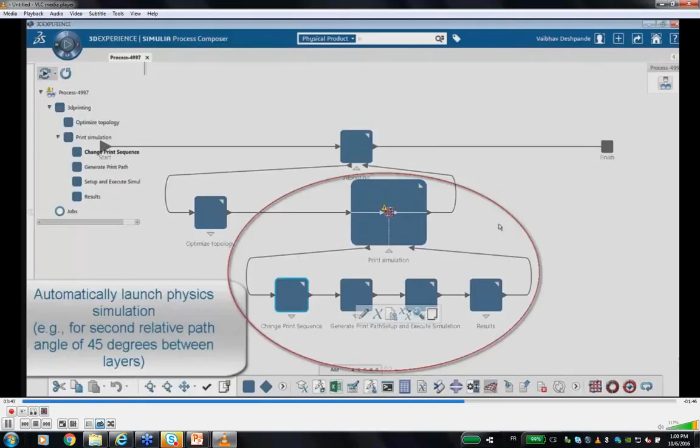So thermal analysis, residual stress, and now we can compare the two options, without rotation on the right, with rotation by 45 degrees every single layer, and check what is the best solution. Okay. Typically, you can see that here we have a lot of distortion and a lot of stresses, which is less the case in this particular area.

We can even imagine that we ask the system to really compute the best option, the best angle to minimize the distortion. And of course, the distortion might occur, but it should be controlled and within the specification of the part. So here, obviously, on the right, it's too much. On the left, it looks acceptable.

And as you can see, I can simulate what will happen during the process. I can have an idea of the distortion of the part once it is printed, and I can really reduce the risk of a failure on the machine.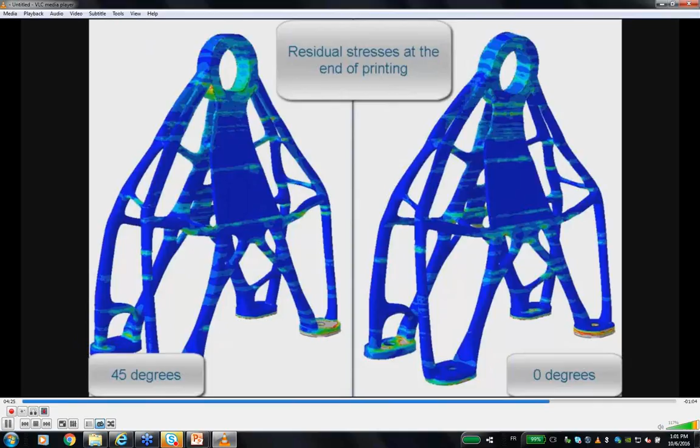For those who are not familiar with the printing machine or printing process, if you take a part which is 100 millimeters high and a diameter of, let's say, 100 millimeters, it can take 100 hours to print. And if after 100 hours of printing you see that the part is not within the specification and you have to throw it in the garbage, it's not good news. Okay, so it's very important to simulate as much as you can upfront, and this is exactly what we do.

And more than that, we can also simulate the process to get an idea of how much material we are consuming and what is the print time, because those are the two KPIs. The cost of a printing process is really depending on those two parameters, how much material I'm using and how long the printing will take.

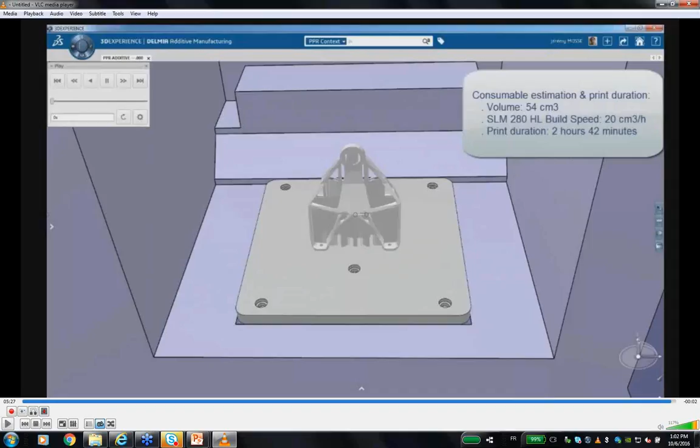Because as you know, a printing machine is quite expensive, at least so far. It's between 500,000 euros up to 1.5 million euros. And if you use it for 20 hours or 35 hours to do the same part, it's a choice. Okay, so it's important to understand that. Here we go. This is for this process.

I'm almost finished. Just quickly to show you that we perform a display for the user, for him to understand where we need some support, so he can modify maybe the design, he can modify the position, or he can rely on our optimized computation of the position. He can also do nesting of multiple parts, because as you know, the good news with 3D printing is you can print at the same time multiple copies of the same part or different types of parts.

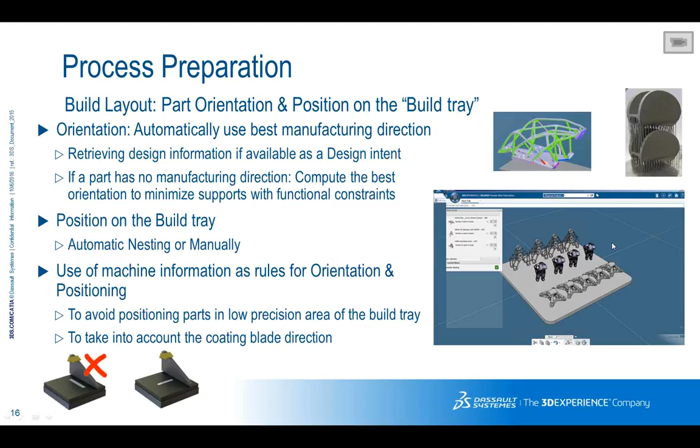For the process of support structure creation, you have various types of support that you can select from. I will not go through everything, but just show you a quick video at the end how to do that. This is the part that we would like to print. The system checks what are the areas, the zones where we need to do support. Of course, this is also depending on the machine itself.

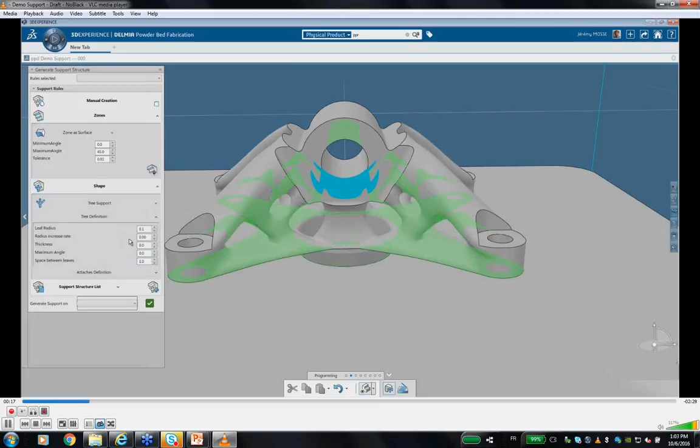You can then select a given area and select your preferred support definition, and the system will perform the support. I will go faster, you can then apply to other areas a different type of support. You see it's inside the same environment, no data transfer. I just take the CATIA part and work directly on the CATIA part. Here I have 3 types of support that you can see.

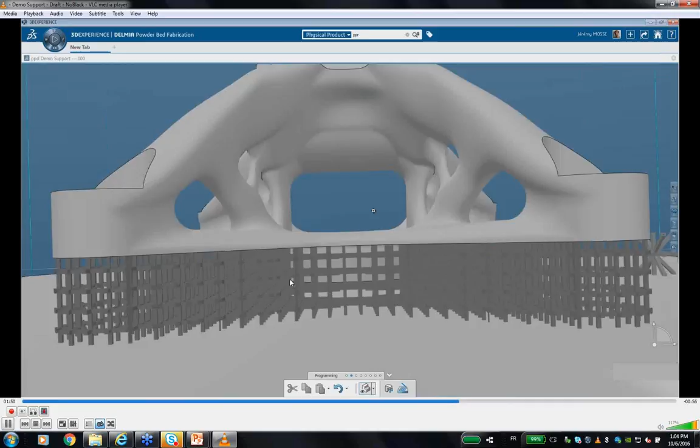And I can also have different support for the bottom. In my case, I will select a microstructure that I will use as a pattern to be created to support the bottom of the part. Remember that all those supports will be removed anyway at the end. By the way, for those who are familiar with 3D printing, this is not a good choice, because this area which is horizontal also needs to be supported. So I would need to take another type of support. But anyway, that's for the demo.

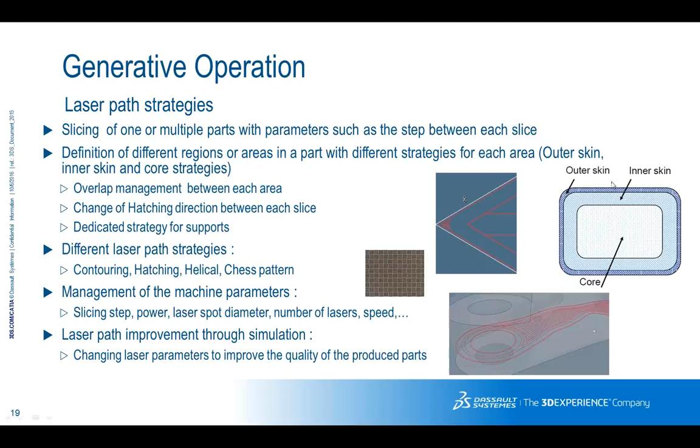And at the end, I have my geometry with all the support that I can slice and where I can perform the path programming of my laser. Finally, very important, you have various options to define this laser strategy. Typical crosshatch or chess pattern. You can also have patterned lasing paths closer to a CAM, computer machining path. You can have various areas on the part where you can define different types of lasering strategy for the outer skin, the inner skin, or the core.

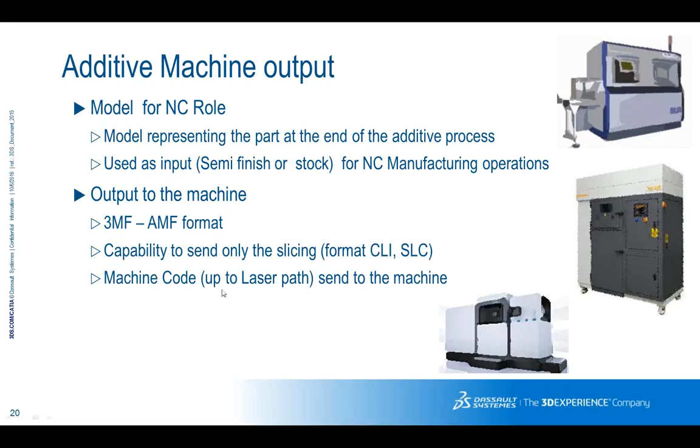And then once this is done, and once you type in the parameters of the power of the laser or the temperature of the cell, you can output that to the various machines that you would like to drive, either in their native format using their API or using more standard formats. Typically here the goal is to really reduce the gap between the as-designed part and the as-manufactured. Taking into account the material, the deposition path, the build definition, the heat, and of course showing to the end user the distortion, the residual stress, and what has been altered in terms of properties.

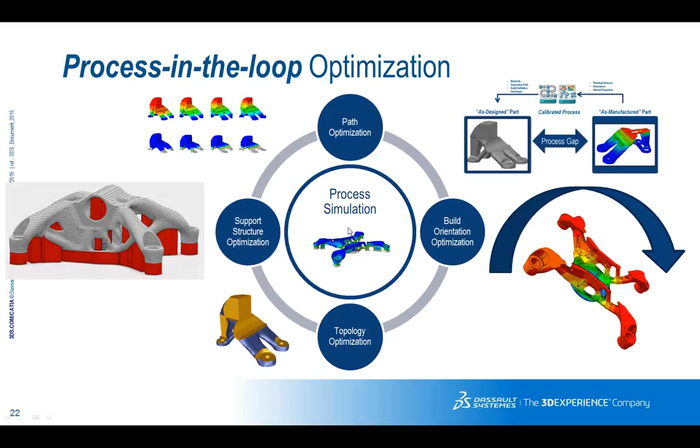So our goal is really to optimize the orientation of the part, to do the topology optimization and also parametric optimization, to optimize the structure, and also to optimize the path, to get the part in the best possible condition, and reduce the cost of printing.

As far as standard formats are concerned, today we can output STL. This is very, very famous. But we also support, in both CATIA V5 and CATIA 3D Experience, the additive manufacturing format from the ISO standard. It's richer, it supports color, it supports material, and there is a new format called 3MF coming from a consortium led by Microsoft, but we belong to this consortium as well as other software vendors, as well as machine vendors.

And this is a very, very quickly changing format. Typically in 3MF, we will very soon support lasing paths. So maybe 3MF will be the de facto standard format for passing information between the various bricks of this additive manufacturing process. And I just heard a couple of days ago that maybe AMF and 3MF will talk together and have a common format, richer than what is available today. So good news.

So finally, we also help you, if you have multiple machines, to really manage your additive manufacturing shop floor. Remember, I told you 50% of the cost of an additive manufacturing part is coming from the finishing. So usually in an additive manufacturing shop floor, you also have, maybe not in the same room but beside, a wire cut machine, because you will wire cut to remove the support.

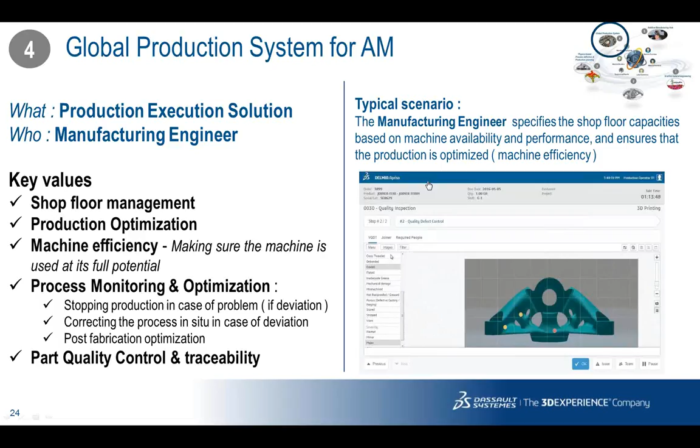You will have machining machines, sandblasting machines, a lot of different machines, and the additive manufacturing machine is just a machine like the others, even if, as you can see, it's not only a new way of building parts, it's also a new way of designing parts. For Dassault Systèmes, it's not an evolution, it's a real revolution. It impacts everything: material definition, process definition, and design of the geometries.

So here, thanks to our Apriso suite of solutions, you can manage your shop floor, optimize the production, and monitor the shop floor, like if you were monitoring your assembly line or assembly production floor in your facilities.

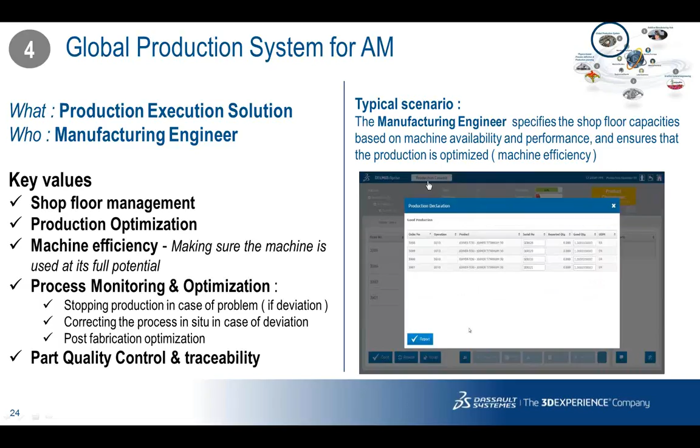So this is available today. And very, very soon, as we think it's an important topic, an emerging topic, we will put on the market before the year end a website. It's not software, it's just a website. You connect to this website. Maybe you design something with CATIA or Google SketchUp or whatever, and you can add in this website your data, your 3D data, and you will ask what type of color, what type of material you would like the 3D data to be printed, and we will put you in relation with members of this community.

They can print the part for you, depending of course on the material, and you will make some bidding, they will propose some quotes, and you will do the deal with one of these companies, and they will print the part for you. We take the money, and once the part is shipped and you accepted the part, we pay the printer. And at the beginning, it will be just a B2C hub platform, but very, very soon this will be extended to be B2B.

So as an industrial company, you can exchange with, of course, suppliers or printers or fab labs, but you can also discuss with powder providers, machine providers, consulting people, universities, to share experience, maybe to buy some incentives, and really it will be a big business platform that helps and speeds up the adoption of additive manufacturing techniques all over the world, because it's a worldwide initiative. So as you can see, Dassault Systèmes is extremely ambitious.